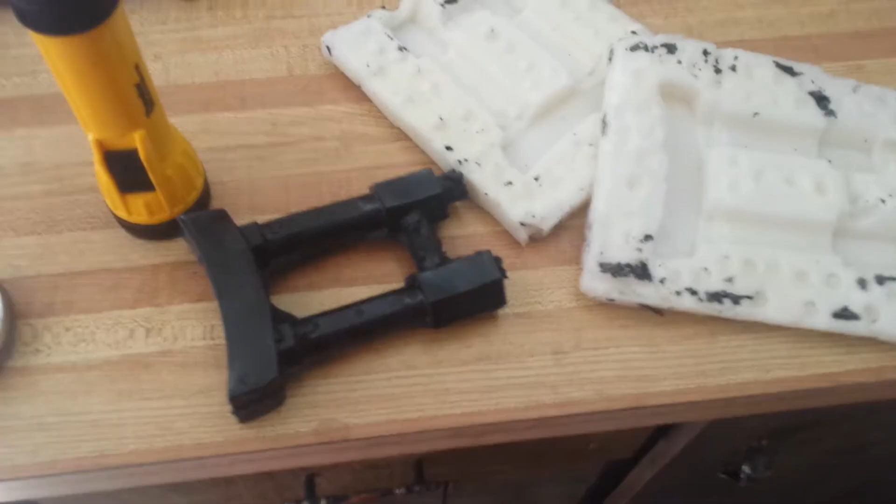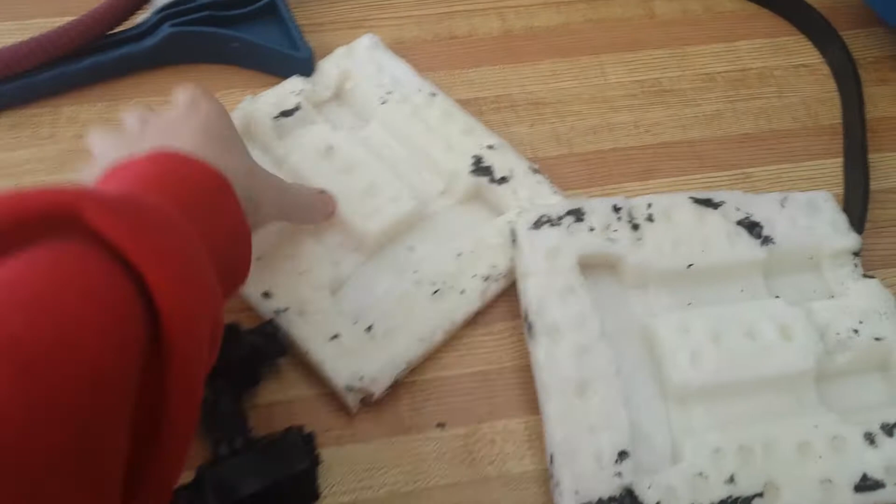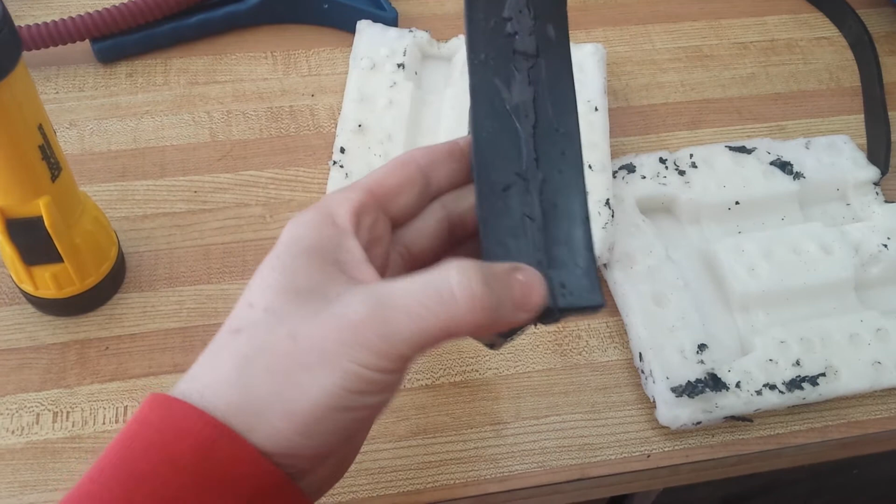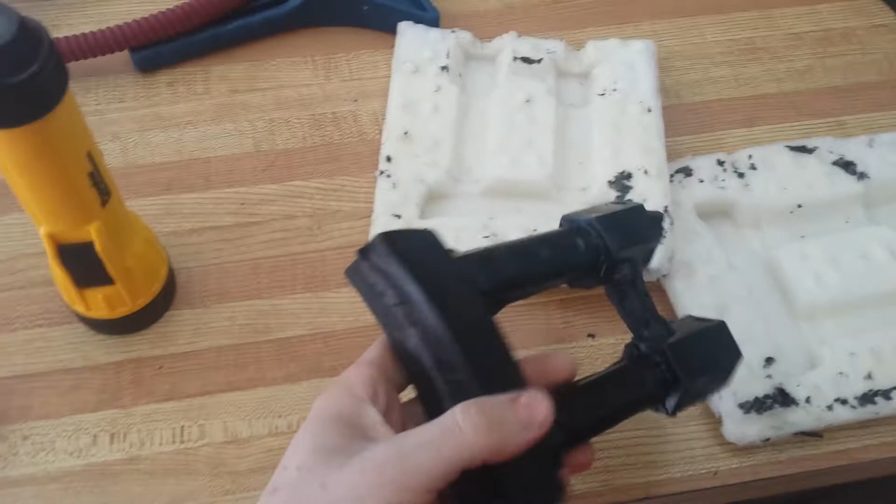Before I cut to the clip of me drawing the stock, I just want to show you the resin cast one. This was a mold made from the Small Soldiers edition, and it's just honestly Oogoo - the silicone and cornstarch mix. The mold actually turned out half decent, but the casting did not, and I really don't feel like casting this again, especially now that I have the part drawn in SolidWorks. It turned out kind of okay, but the mold exploded, so it's way fatter than it should have been, and it's super warped, and it doesn't have this feature - I didn't think this all the way through. This was the first thing I ever cast in my life, before I ever got into machining or went to school or anything, so I was super new. I probably should have done a 2-part mold for each half, and then maybe it would have come out like the actual injection molded part, maybe.

But I just did this solid chunk, and I was planning on just dremeling out the back and shoving bolts through it. Good thing I didn't do that, that probably wouldn't have been that nice. This is super, super heavy, so I abandoned that a long time ago, but I kind of just keep it for nostalgia. I'm sure I'll throw it out one day, but for now.

Oh, there's my old pump snap. This is the part of my house that nobody uses, it's like a storage room. Yeah, never mind. But yeah, we'll go check out me drawing it now in the past.

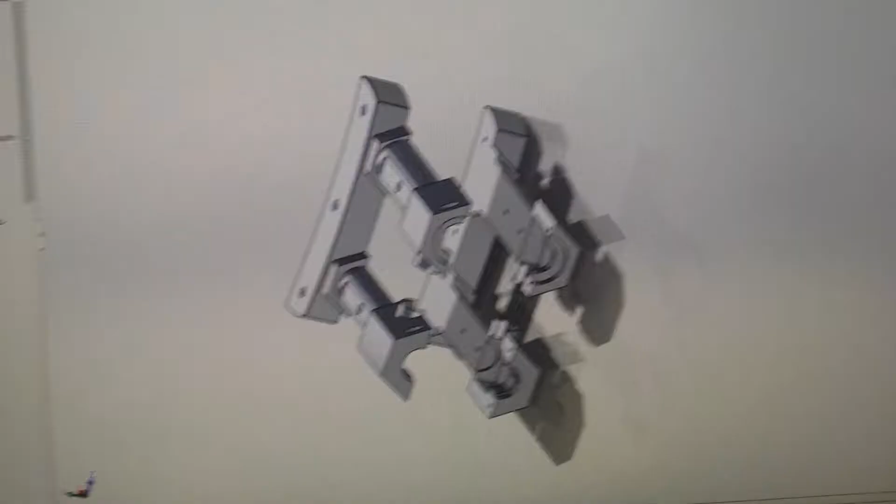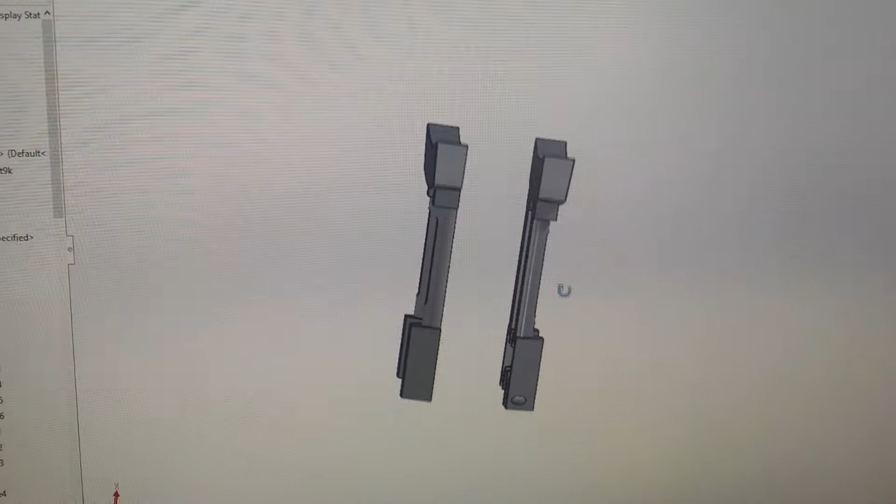So I just finished drawing this stock, and you may recognize it as the Supertech 9000 stock. I just have an assembly here of the two halves. It's mostly solid except for the part that's going to go into the shell, and it's pretty close - not exact, but close enough. It looks the same, and the screw ports are in roughly the same position, not that that really matters.

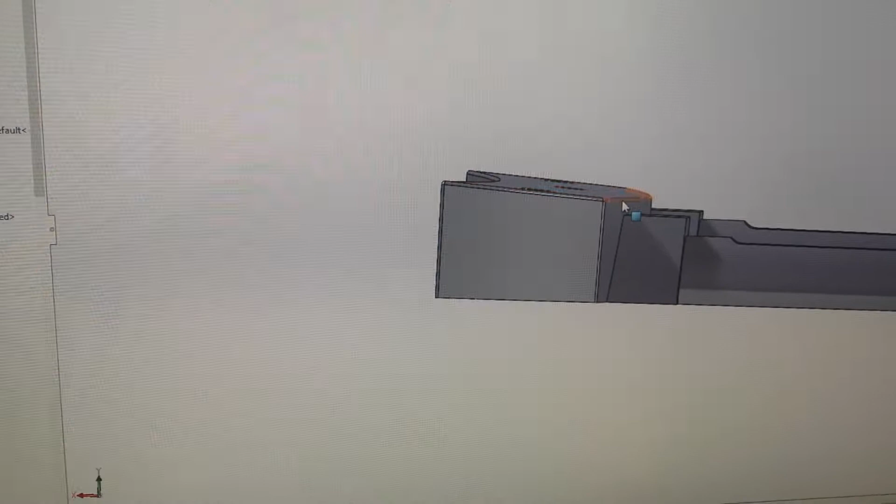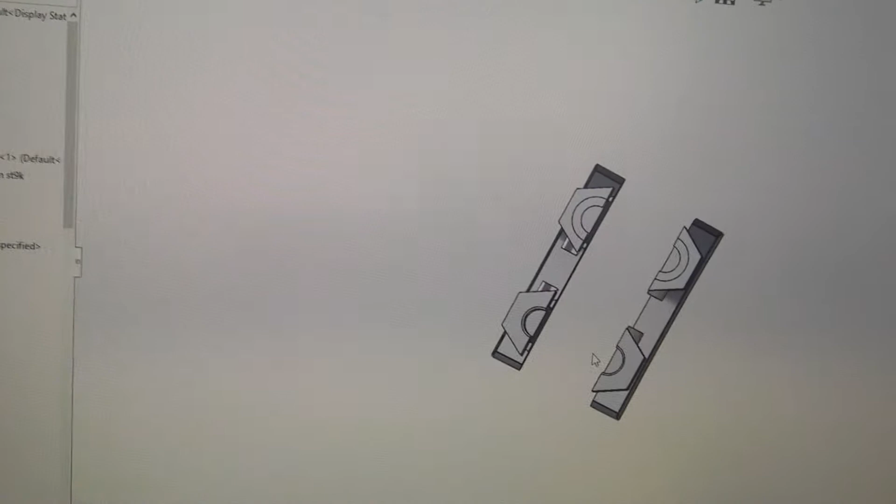I'm considering making one change - see this right here, this feature? Injection molding it is fine, but 3D printing it won't come out that nice, it'll be stepped and you'll see quite a bit of layers. So I think maybe for the sake of 3D printing I'll just make this flat, and it'll turn out a little bit better. I don't think that little angle will make too much of a difference. I'm going to print it like this, see how it goes, and then maybe the next one I'll take out that angle. I tried to make it a pretty tight fit, so hopefully it's not too tight.

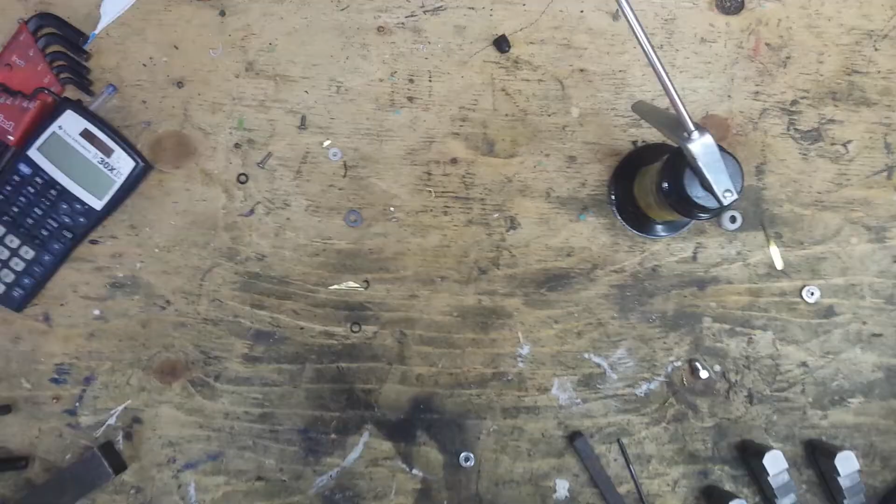Hopefully you just saw the video of me drawing that in SolidWorks. I just want to show you the air tank that I have inside the blaster. This is a different one - I made 3 actually. One is way too big and I never bothered finishing it. You can screw it together enough for it to be the right length, but I was going to use this 1/4 inch rod, since the back of the tank is 1/4 inch, and I thought it'd be easier to work with that.

But the way I wanted the pull pin to go wasn't working out so well, and the 1/4 inch was a little too much to bend the trigger, so I ended up doing it again using this thinner stuff. I forget what it is, but it's the right size to run a number 6 die over, which makes it easier to do the mechanism in the front to seal the tank.

It's gooped together because the threads weren't tight enough to hold the air, but that's fine. This is bored out of a piece of solid aluminum bar stock - boring, internal threading, external threading. Then it's got a hose barb drilled and tapped in there.

It seals the same way a normal Nerf tank does. I cut open a 2K tank just to see what they did, and it was kind of what I expected. There's a spring in here, one end pushes against the seal here, and the other end pushes against a little O-ring in this piston. So there's a small piston with an O-ring pushing against the back of the tank, which squeezes the O-ring against the rod as well as the back of the tank, sealing it. When you pull, it releases the tank. I guess you could call it a dump valve.

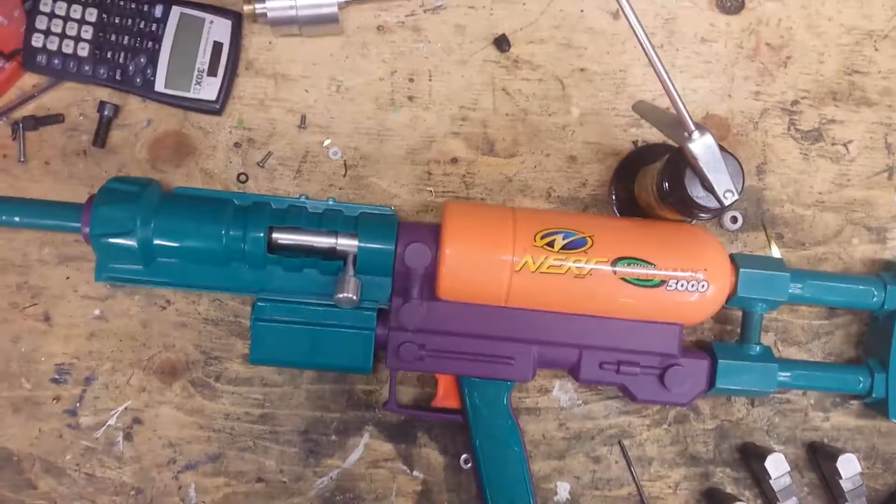I did something a little different this time, because all the other 5Ks - I didn't have a lathe at the time, so it was all hand done out of PVC and polycarb with a hole saw and all that craziness. I didn't feel like doing any of that, honestly. I hate doing that kind of work nowadays.

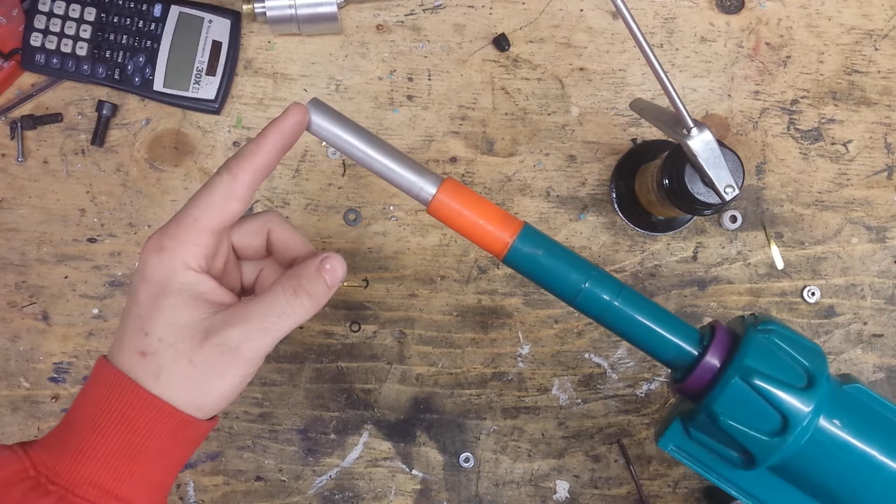So it's just a lathed piece of aluminum, one piece. This isn't a standoff anymore - it's a solid piece of aluminum, turned down for the shank area. There's a set screw that screws into there and sticks out enough to be screwed into the aluminum. It's the same breech I always do - brass, telescoping into my favorite barrel material. This is probably about this length, and it's McMaster aluminum, the stuff everyone seems to be using these days. I absolutely love it.

That's pretty much it - the breech is all polished, and here's a closer look at the stock. I sanded it as much as I felt like. I hate that kind of work - I don't like painting and sanding - but I gave it a good sand. Then I coated it a few times with primer, sanded it again, one more coat, and then a few coats of this. It turned out okay. It's definitely not like an injection molded part - you can see the layers a little bit, but it's better than just painting a 3D printed part, I think.

That's pretty much it. I guess we'll do one shot, and then that'll be it.

Since this is an aluminum tank, there's no real limit to the pumps - I pumped it 15 times just to test the tank, and it was fine. So this is just 6 pumps like you normally would in a regular tank, and that's with a worker dart.

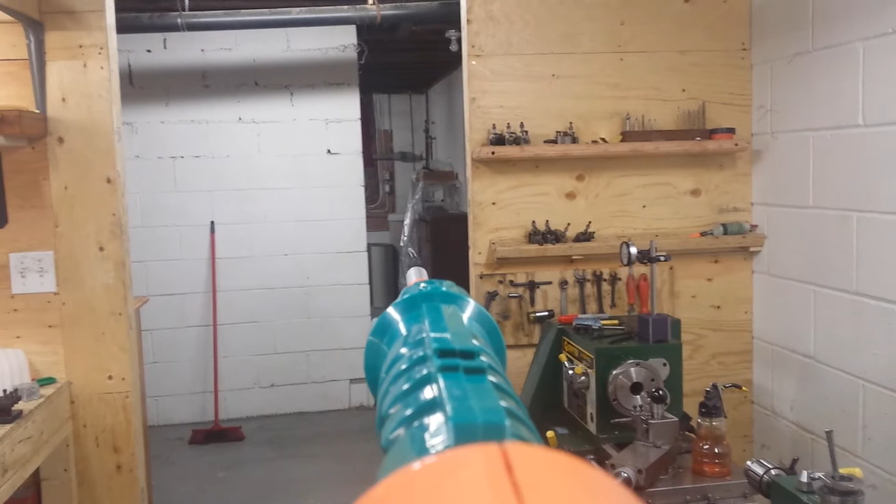So, normal 5K performance. I'm pulling it with my left hand with one finger. Usually I use my right hand and two fingers, so it's probably not as much power because I can't pull it as quickly as with the other hand. But you get the idea. You've seen tons of these out of me before, and I hope you like it.

The fit up isn't as nice as I would like, so I'm probably going to revise the stock a little bit. I don't really feel like printing a bunch of these things, so maybe I'll just print this section and test the fit a few times, and when I get a good one, I'll do that.

That's pretty much all I've been working on lately. There's another blaster in the works, a super old project that's been put on the back burner because of school and work, and then I really wanted to crank this out. I'll probably show you that hopefully soon. I've been doing more machining projects lately.

If you're interested, I've got kind of an interesting milling setup going on here. I have no good way of holding round parts on the mill. I don't have those special V blocks you could use, or really long toe clamps. I don't have toe clamps that long. I guess I could just clamp this straight to the table with the clamps, but then I'd have to take my vise off, and I really didn't want to do that. So I kind of got a little creative.

I got these aluminum blocks just for risers, and then my longest toe clamp bolts and toe clamps. The 3-jaw chuck from the lathe is off right now, just loosely sitting in the vise, just snug, and then the clamps are holding that down. The actual chuck is holding my part, and I'm just milling a slot in there for something I'm doing.

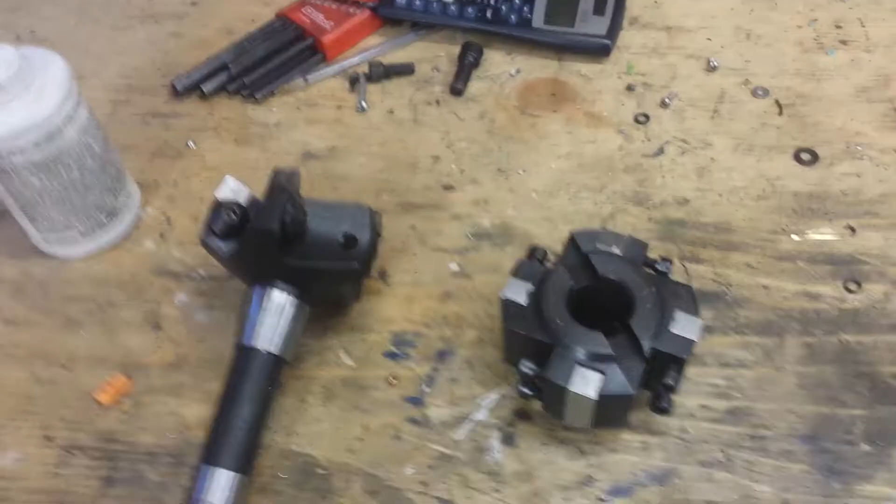I'm doing kind of a setup with these shell mill holders. Here, I'll show you. This is a shell mill — a cheaper shell mill. It just takes these high-speed steel inserts, which I like because it's easy for me to sharpen at home, and they just fit onto these shell mill arbors.

So I have one of those. It came with this shell mill, and I just found it on eBay — I have no idea what it is. But shell mills were kind of replaced by stuff like this. This is a face mill, and they take something called indexable carbide inserts, which is quite a bit more modern than high-speed steel, and better for most things.

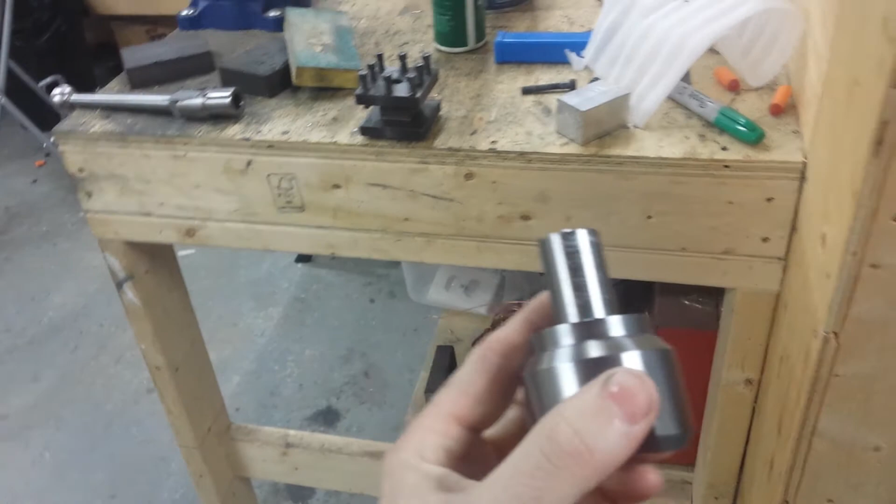But I bought this specifically for plastic and aluminum because I don't really get the best surface finish with this guy. So what I'm doing is making another head to fit my shell mill holder, which will basically be a giant version of this, my small fly cutter. So it's going to be a large fly cutter, and I'll show you an even smaller one so you get the idea — there's a little baby one, and then a little bit bigger one.

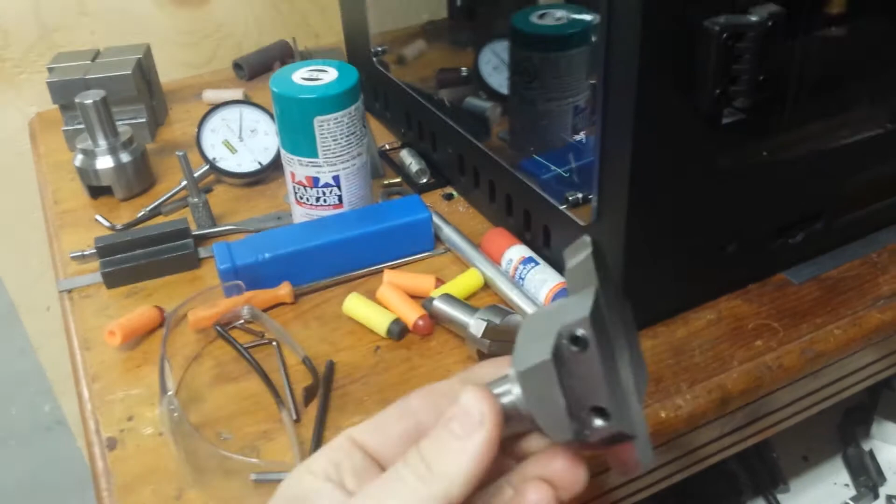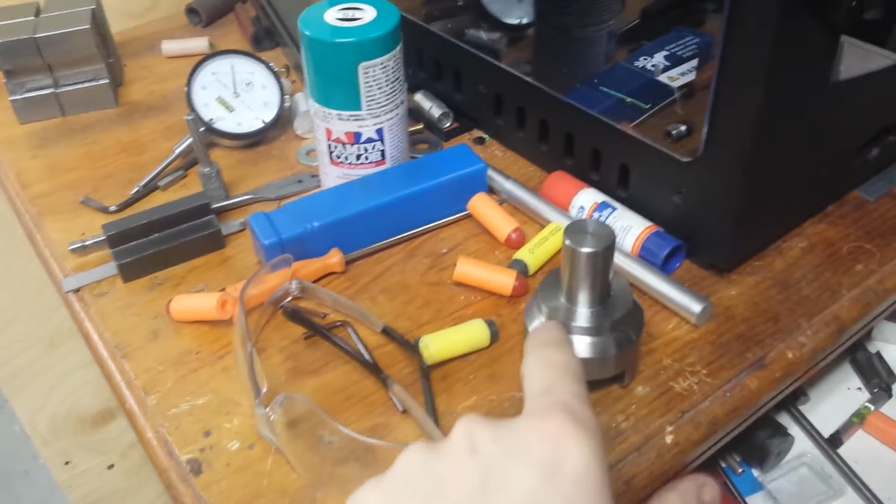These take high-speed steel bits, but this guy here takes a lathe tool — or it kind of looks like a lathe tool, but it's made for this. I'll show you that too. It takes these bars here, as opposed to the high-speed steel thing, and then you can use the indexable carbide inserts again, and that fits in this guy there.

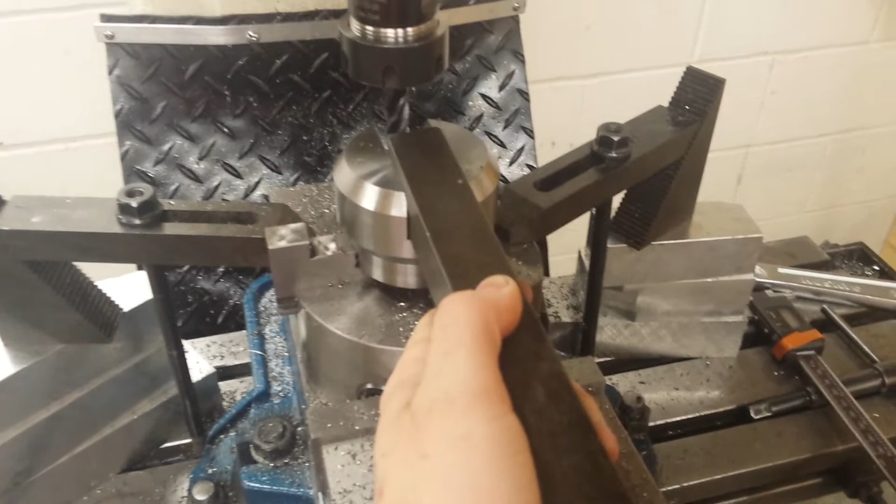So the idea is — sorry, I don't know why I pressed stop — but the idea is to make a giant one of these, and then I'm going to make a fairly long bar. It might have two edges, or it might just have one, and it'll fit in there. It's a pretty nice fit, and then that'll go in my shell mill holder, and that will be for surfacing really big parts, like some engines I need to resurface — engine blocks.

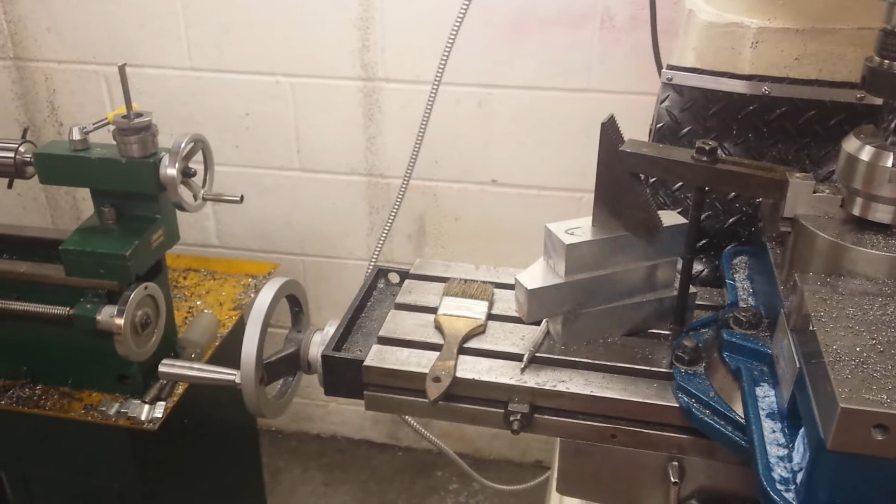I don't even know if that's what they're really called. I call them engine blocks; it might be something else. But they're not here, they're at the shop. And then I have some other exhaust manifolds to surface, some big ones. I'm going to try and do a couple at once with this big bar of tool steel. Maybe I can make a fixture to hold like three of them and then just go across all of them at one time — make a little more money that way because I can do it quicker.

And hopefully this is a good tool. But anyways guys, you know, getting really off topic.